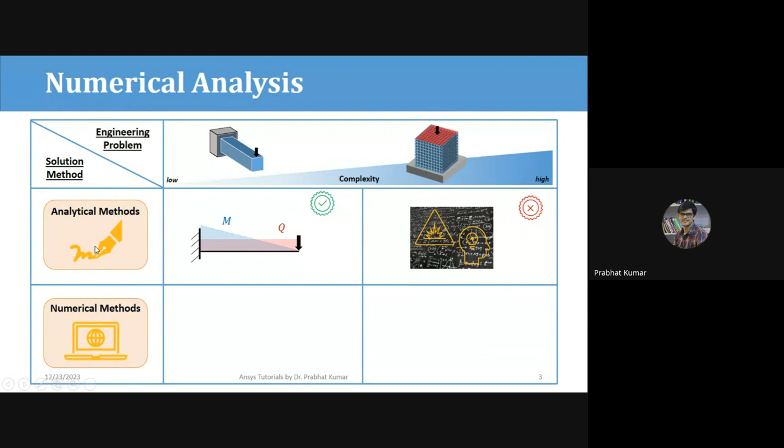Will you be able to do it through hand calculation, the analytical methods? The answer would be no. It is very difficult, next to impossible to obtain the stresses. So for that, we use numerical methods, either Ansys or the different software already available. Here we will specifically talk about Ansys. Through Ansys, you can carry out any type of problem, either simplified problems like this or complex problems also.

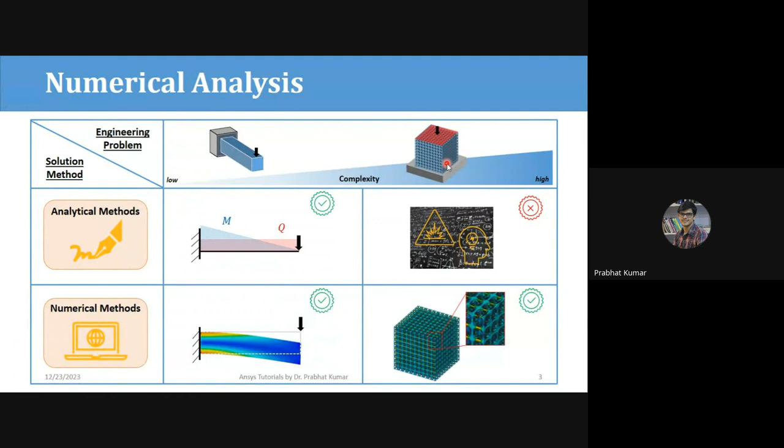Now let's expand our question, like why we use FEA. So there are generally two terms, FEA and FEM. So don't ever confuse these two terms. FEM is the finite element method. It is the mathematical method which is used to conduct FEA.

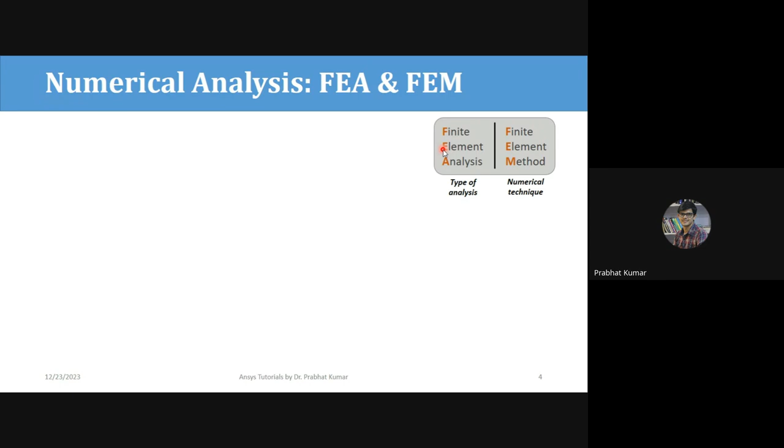FEA is the analysis. And in this FEM, there are different partial differential equations which are solved to describe the physical phenomena. On the other hand, FEA is performed using FEM, and it is implemented in computers basically, so softwares and all. So these are the tools which are basically providing a solution for virtual prototyping.

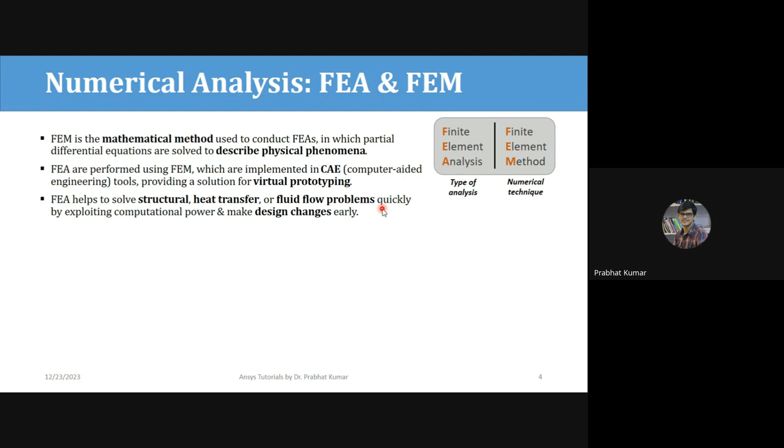And FEA helps to solve structural, heat transfer, several types of problems very quickly, just by exploiting the computational power, and we can make design changes at very early stages of product development. That's why we use FEA.

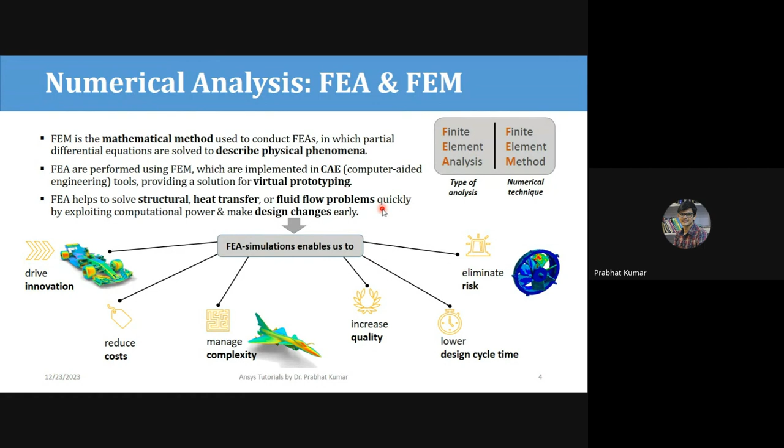If we talk particularly about Ansys, most of you will know Ansys Incorporation. This is the company name, which is the developer of the Ansys family of products. They have a range of products. The global headquarters is in the USA, and they have various offices around the world.

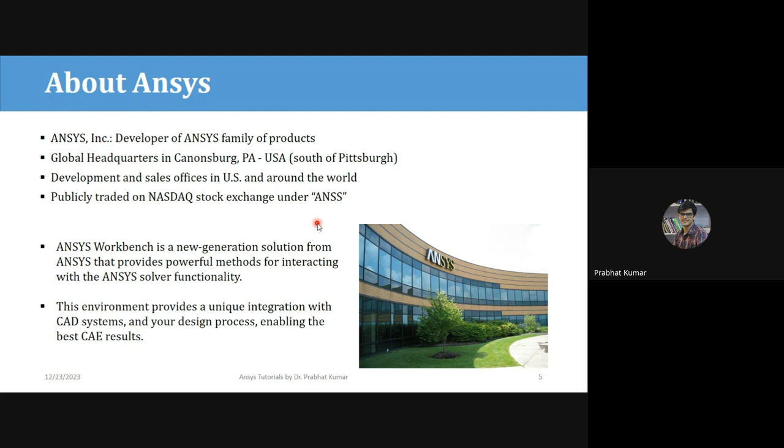We will mainly talk about Ansys Workbench, which is a new generation solution from Ansys, and it provides various interacting methods with the Ansys solver. So in this Ansys family, there are several types of UIs and modules which you can use. The first one is Workbench, in which you can observe the complete environment for simulation and modeling needs.

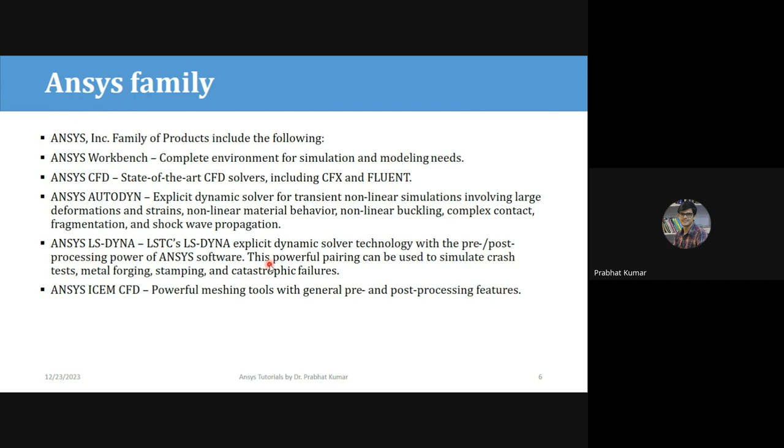There is Ansys CFD, which is computational fluid dynamics. They have different CFD solvers like Fluent, and there is also a dynamic solver for transient nonlinear simulations. They have LS-DYNA, which is an explicit dynamic solver for simulating crash testing, metal forging, stamping, and different types of failures. And they also have some meshing tools.

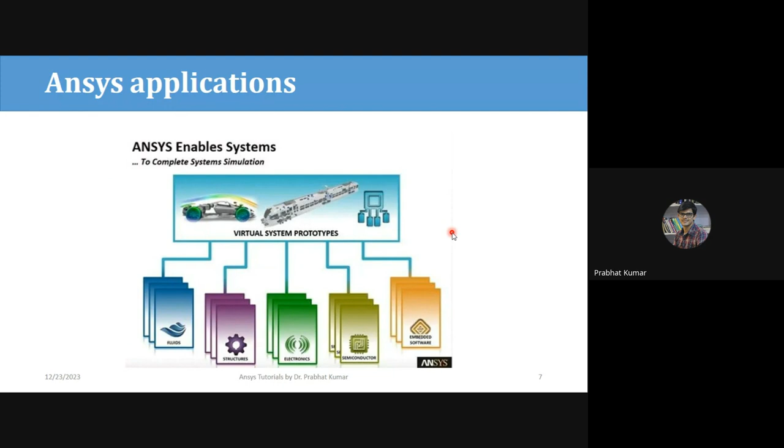So now Ansys, whatever modules you have seen, they have applications in every sector. Be it automobile, defense, even semiconductors and embedded software. That's why this is a complete package, and it is well known in the industry. So what we will particularly focus on today is Workbench.

Now in Workbench, there are also different types of analysis which you can do. The first one is linear stress analysis, where you can determine the deflections, the stresses, factor of safety, etc., mainly under static loading. There is also modal analysis, where you can determine the natural frequencies of the system, including the effects of loading on already pre-stressed structures. So these are the different mode shapes which you can observe when you pre-stress any structure.

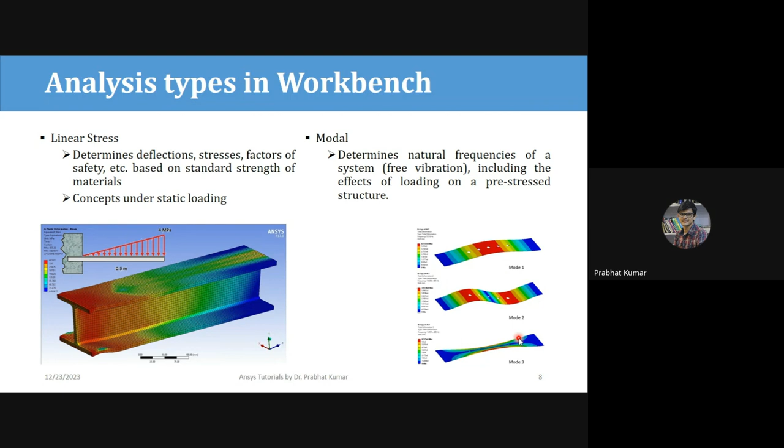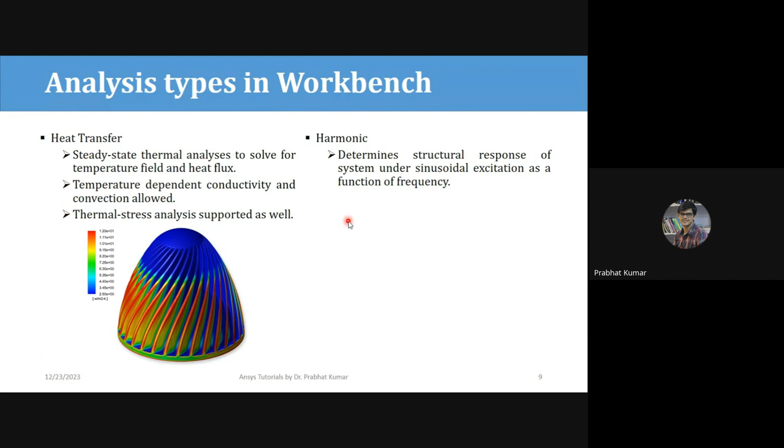Also, you can use heat transfer analysis, where there is steady state thermal analysis to find out the temperature field and the heat flux. Also, you can use Workbench for harmonic analysis, where you can determine the response of certain structures under different types of excitation. So this also you can easily solve. So these are the different types of analysis which you can get through Workbench. I'll explain in actual Workbench also.

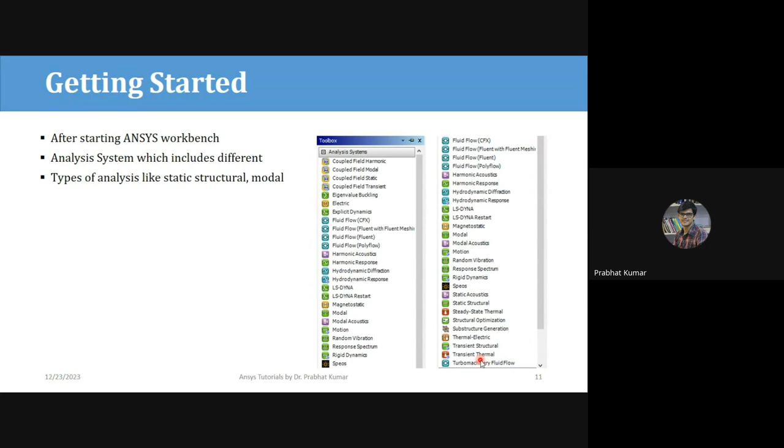So as I've explained, after starting Ansys Workbench, these are the analysis systems. So here you can see explicit dynamics, harmonic response, modal analysis. There is rigid dynamics also, and then there is static structural over here. Transient structural is there. So all these are the analysis systems which are available.

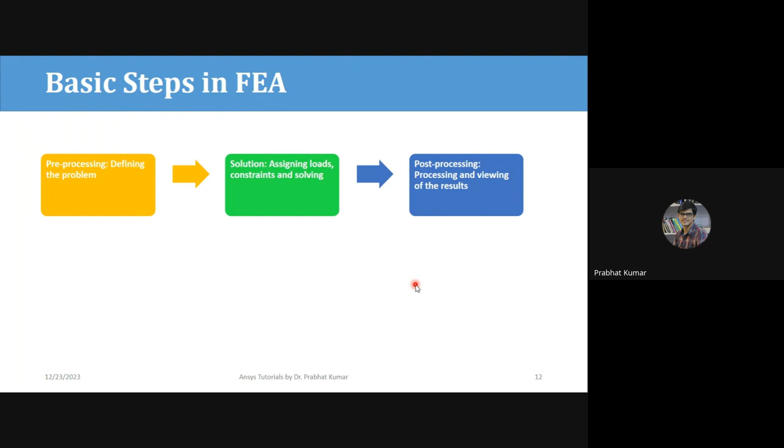So before going into the actual analysis part, what are the major steps which are involved in FEA? So there are 3 steps. The first one is called the pre-processing, in which you define the problem. And then the second one is the solution, in which you assign the loads, the constraints, and you solve it. The third one is the post-processing, where you process and view the results.

So in pre-processing, you define the key points, what are the element type, material, what are the geometric properties, what are the material properties, and then you mesh it. So what is meshing? Meshing is a type of discretization. So if you have a big rectangle over here, and you discretize it into smaller rectangles, then this activity is called meshing. So the entire FEA is based around the meshing, because you mesh and then you apply the loading conditions, and then you get the results.

So in the solution part, the loads and the constraints are specified, and then you solve the resulting set of equations to get the desired results. In the results, you can observe anything, whatever point of interest you have, whether it is displacement, whether it is forces, or you can also get the stress contour diagrams and everything.

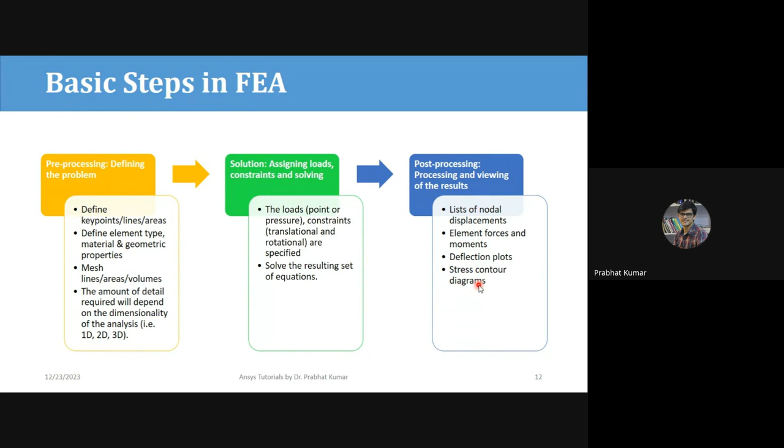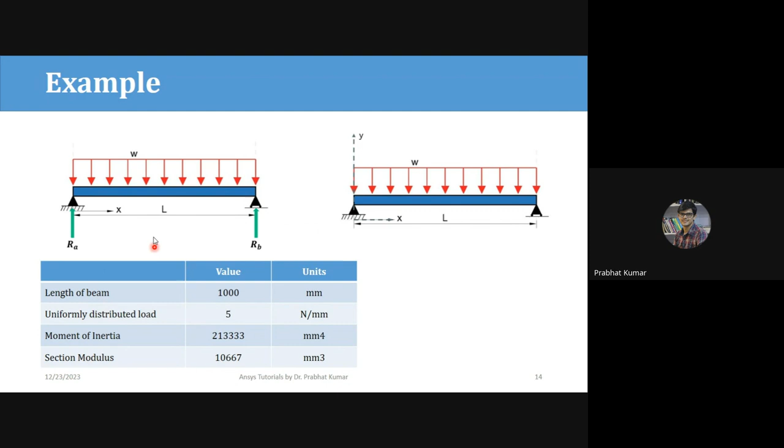So I'll start with the basic pre-processing of one Ansys example. So let's say this is the example, which is a simply supported beam. Okay, so it has a uniformly distributed load over here, and these are the reaction forces. And what you have to find out is what are the stresses and what is the deflection. So how will you do it?

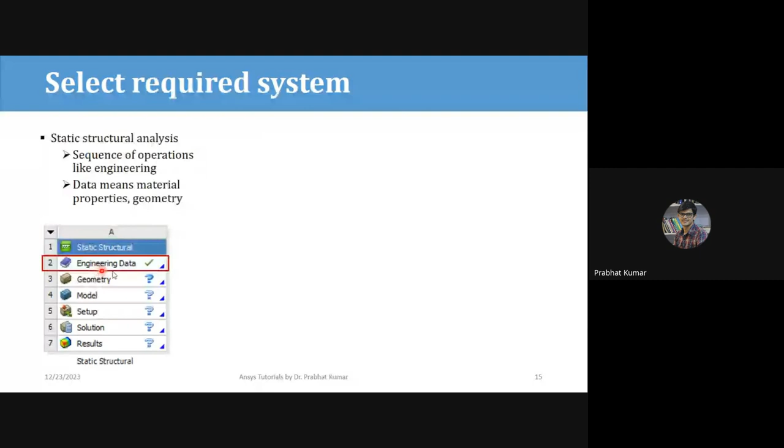First, you start the static structural analysis. So this type of dialog box gets opened up. I'll do it live, and then I'll tell you that also. But before that, let's get an overview. So in this, when it opens up, the first thing is engineering data, and engineering data has the material properties. So when you double click it, such a type of box will get opened up.

So by default, Workbench has structural steel as the default material. It has the properties which you can see over here, the density, compressive strength, and everything. So apart from this, there are different types of materials over here, which you can see. So these are the material properties basically. Let's say that there is a whole library of material which is already available, and you are not finding a suitable material for your need. So how will you do it then?

So for that, you can add a new material also. And for adding any new material, you need only two properties, basically density and the Young's modulus, the modulus of elasticity. These two properties are needed. When you feed them, you can have your own material ready with you.

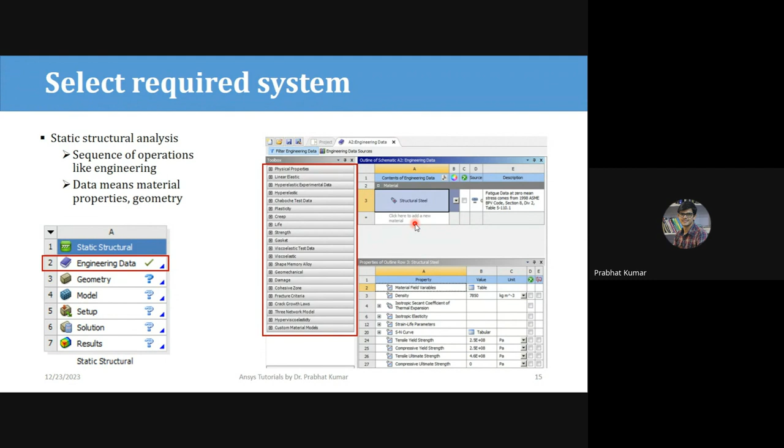So the next part is geometry. In geometry, there are two options. Either you can create the geometry in Ansys DesignModeler or SpaceClaim, which is their own interface which you can use for designing purposes. Or the second one is you can design any geometry in the software of your interest. Let's say you can design it in SolidWorks, in Creo, CATIA, anywhere, and then you can just import it. For importing, you have two formats. You can use IGES or STEP only.

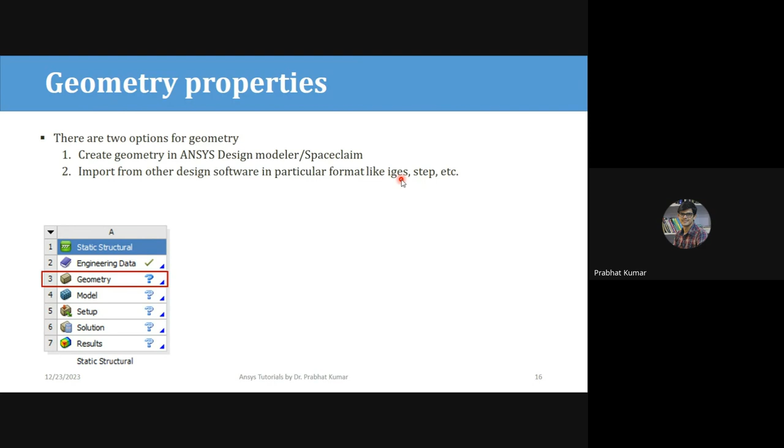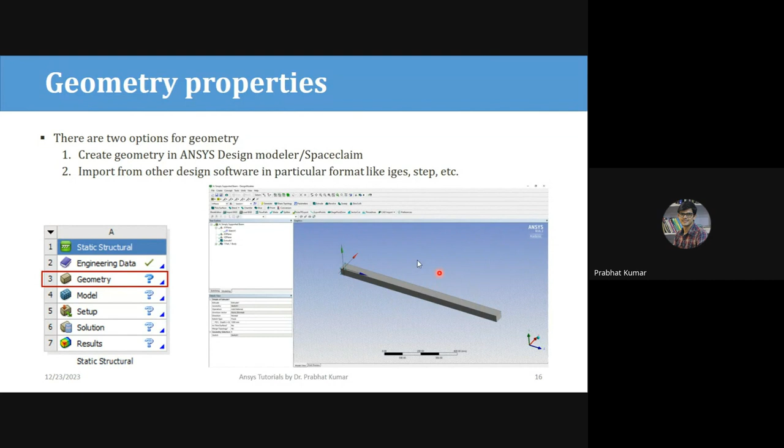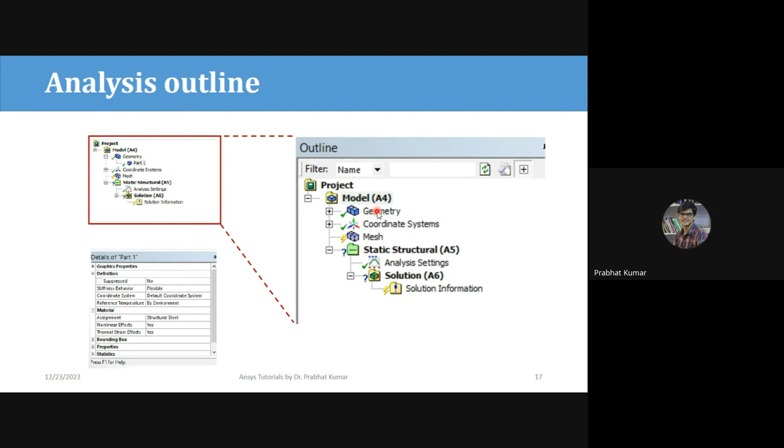So this is the example, the simply supported beam. This is designed in DesignModeler. Okay, so I'll explain that also later on. After this material, the third part was you click on the model. Once you click it, such a type of dialog box will open. Here you can see you have geometry, the coordinate systems, meshing, analysis settings, and everything. So you click on the geometry and then you can see what material you have given, whether it is coming over there or not.

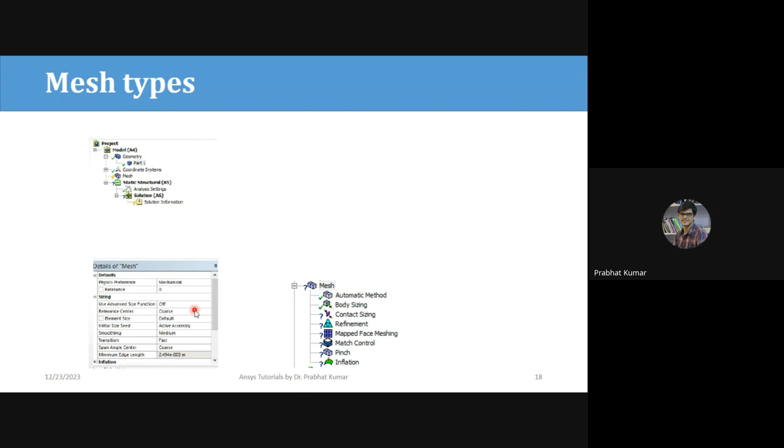But there is a whole lecture which needs to be delivered for this meshing. Meshing itself is a huge task. Here you can see different types of methods which are there in meshing.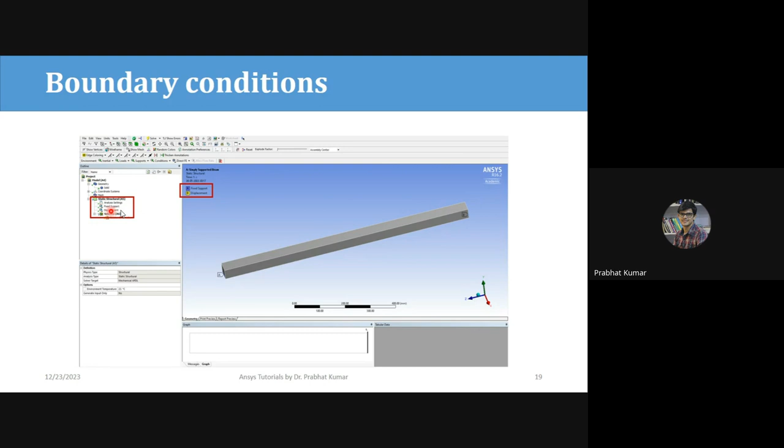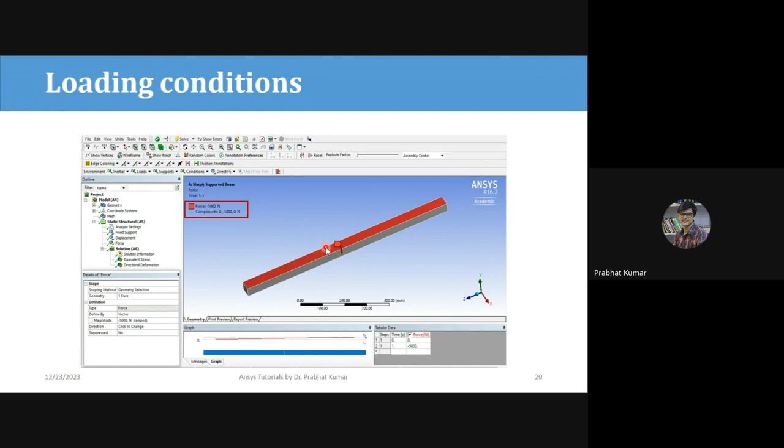So for that, you can just right click on this static structural and you can insert these supports. Okay. The next is, after applying the boundary condition, you have to apply the loading condition, like what loads are there. So let's say we are applying a load of 5 kilonewton. So this is the type, and then once you apply the loads and everything, you do the post processing. You just solve it, and after solving, you get the results.

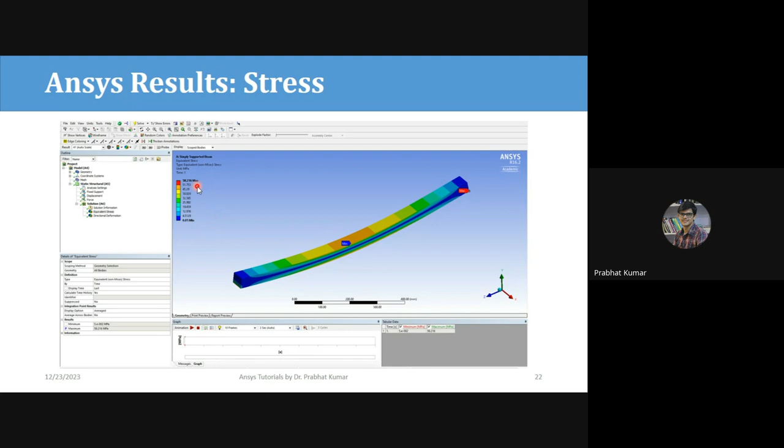So that simply supported beam has a stress value of 58 megapascal. This you can compare with the yield strength of the material, and you can see what is basically the factor of safety. That also can be easily calculated through Ansys Workbench. You can also observe the deflection. Here you can see the deflection is around 1.2 millimeter. So through this you can cover a basic overview of Ansys Workbench.

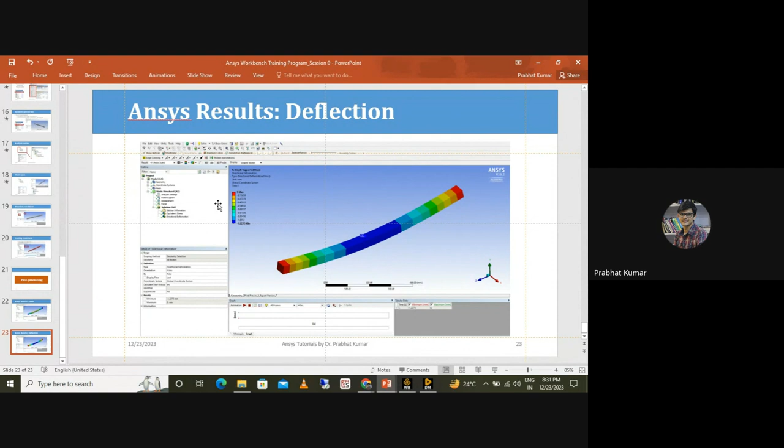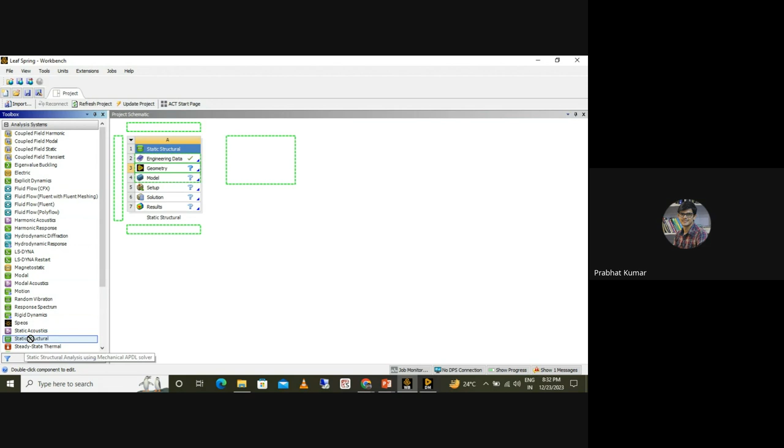Okay. Now let me show you the exact UI. So here you can see this is the user interface when you open it. Okay, this static structural will not show up. How it will come: either right click, double click, or you can just pick it up and place it over here. So that also works. So after clicking the static structural, this type of dialog box you can see.

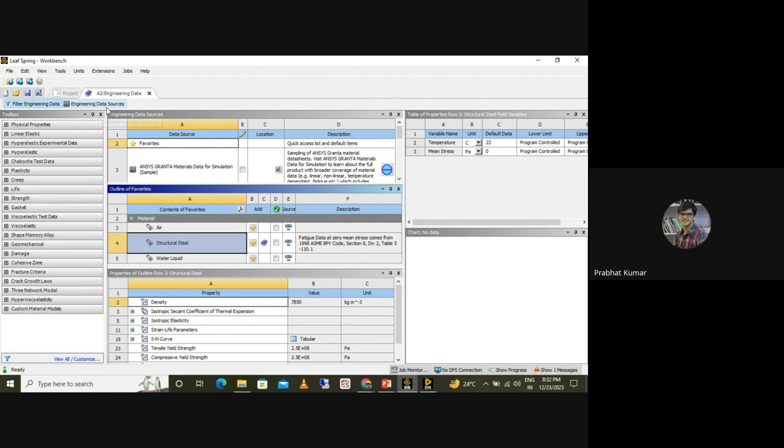So as I have explained, you have engineering data. Okay. So in the engineering data, you can see different types of materials are there. Here is the engineering data source. Here you can see what the materials are. So air, water, liquid, a lot of materials are there. Here you can see there are geomechanical materials, there are composite materials. So everything is there.

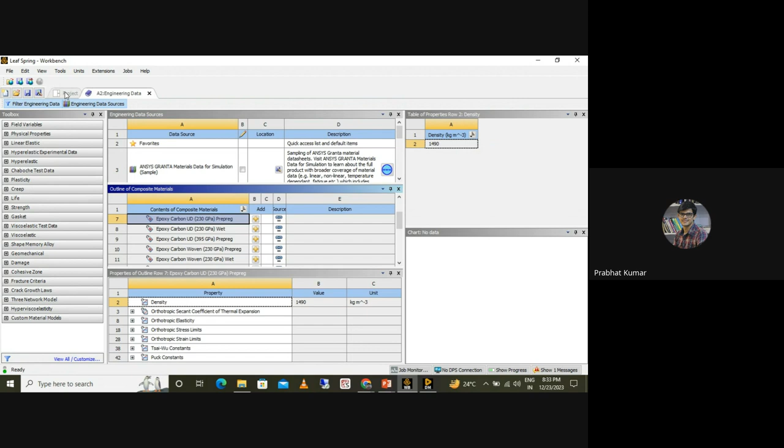So you can just click on this epoxy and add it, and it will be added. And then you can go to your project. So for now, I have not selected any material. By default, it will take structural steel as the material. So after that, what you have to do is import your geometry. For geometry, I have already explained there are two ways. The first method is you can design your own geometry in DesignModeler or SpaceClaim, and the second one is to import it.

So for creating, just right click, and here you can see. Since I have already opened this DesignModeler, it is asking for edit geometry in DesignModeler. But when it is not opened, here you will be getting new geometry in DesignModeler, and you have to click on DesignModeler. So once you click on DesignModeler, this type of user interface you will get. Okay.

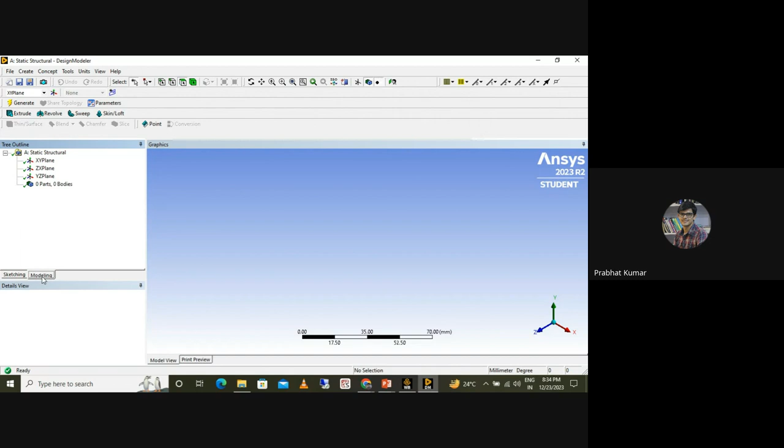The very first thing you have to do is click on the units and set them as per your requirement. Somewhere it is inches, somewhere it is meter or millimeter. So we will go with millimeter. Okay. So here you can see these units are displayed over here. Now in DesignModeler, there are two modes. Here you are able to see sketching and modeling. So this is the sketching module which we will use.

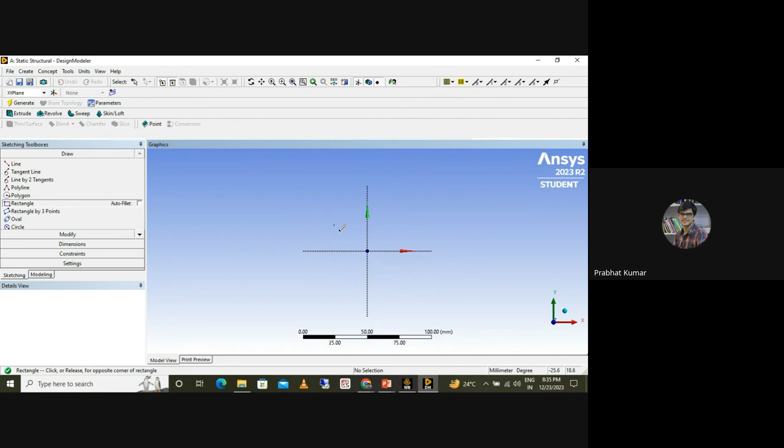And let's say I'll just go and explain the normal one. Let's say we are making a normal rectangular plate with a hole. So how will we do it? We'll just click on sketching, and then we click on a rectangle. Before clicking on that, here you can see it is in 3 dimensions. Okay, it is the XY plane basically. Now what you have to do is click on this look at face sketch so that it will be perpendicular, and then you can go to rectangle and draw a rectangle like this. Okay.

Now it has been drawn. You have to provide the dimension. So just click on dimension and click here for these 2 dimensions that we need. By default it takes h1 and v1 or v2. So h1 is this one. Let's say the square is of 50 by 50. So you click on 50, then you double click here, make it 50, so it is a square.

Okay, again you go on draw. Maybe we will draw one circle. And then again go on dimensions, you can give dimensions to this. Let's say it is of 20 millimeter diameter.

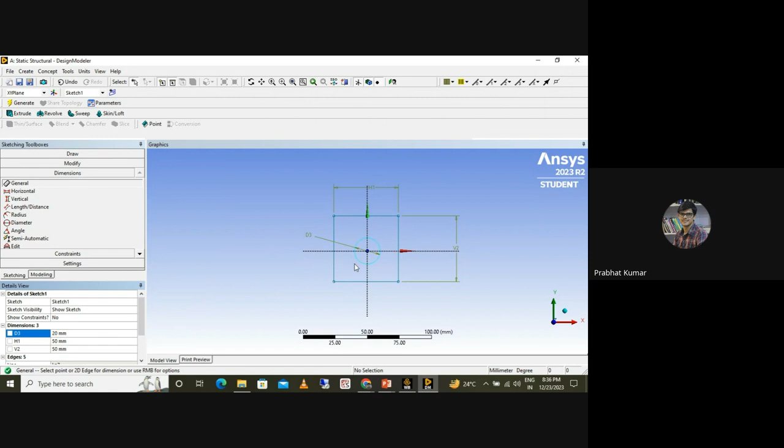Once you draw it, what you have to do is you have to extrude and click on this generate. Now you can see, so this is the small square plate with a hole, center hole in this.

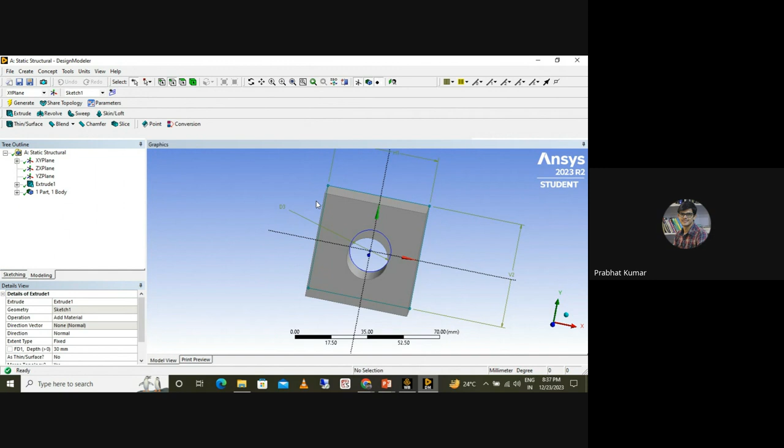So what you can use is you can go here and then you can just open the model part. So when you open the model, the one part that you have created in design model, that will get opened up in the actual model part automatically. But let's say that we want to just import our already saved file, which is there in some IGS format. So then we can go on geometry, I'll show that also later on, and then we can import it from there also. So let's give it a little bit of time so that it gets opened up.

So here you can see this is the interface of the mechanical workbench. It is still opening up, so we will be able to see.

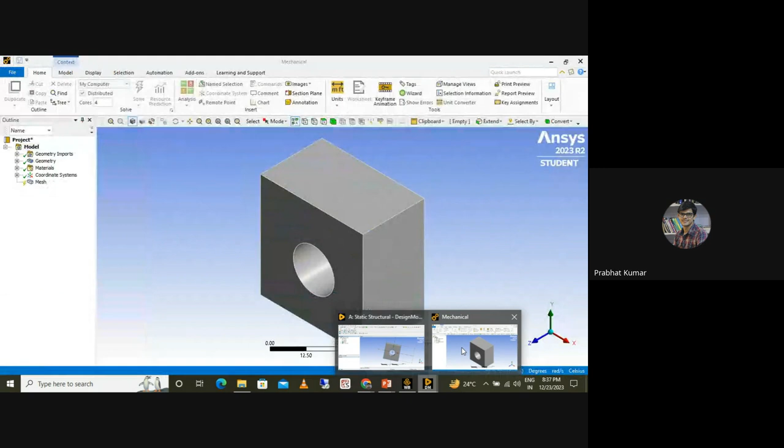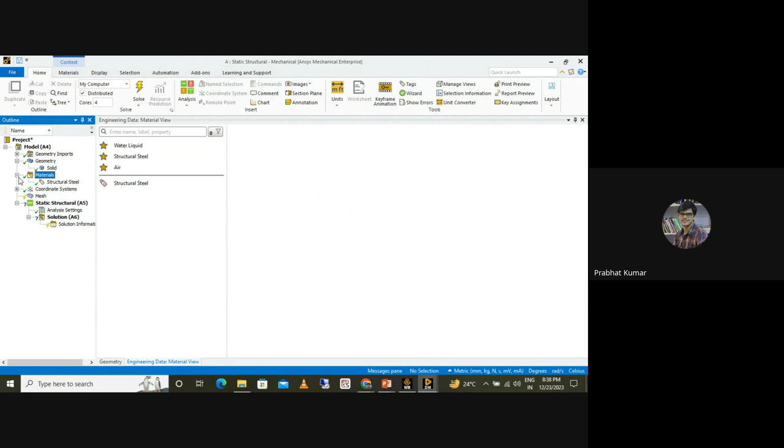So this is the part that we have already designed. Here you can see the geometry, it is a solid. Then material, you can see structural steel, it will take it by default. Structural steel has the following material properties: Young's modulus, the Poisson's ratio, everything.

And then we'll go on meshing. I think it is still opening up.

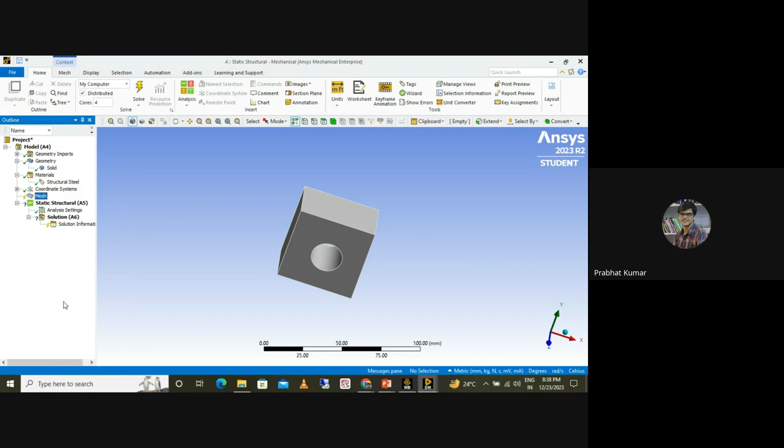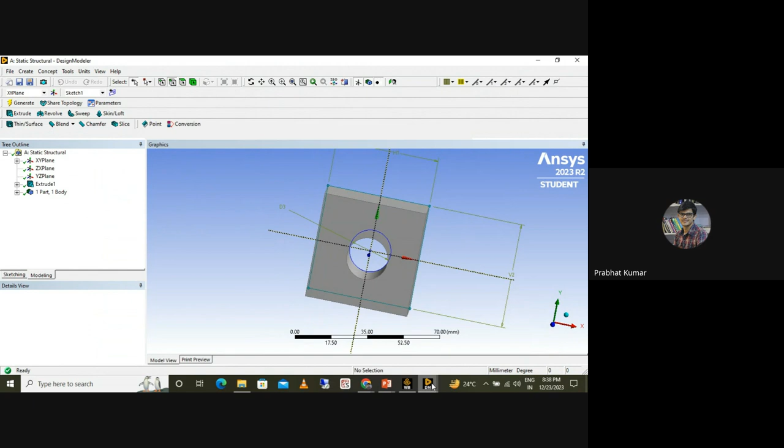So this was just an example which I was showing, in which I showed how you can use the design modeler part. In Ansys, you have two different modelers which you can use. Now I'll just close it, and I'll open the actual one, the leaf spring part, which I'll be explaining.

So this design modeler which I have just shown right now, that is good, but for easy parts, not for complicated parts. Let's say you have to make some gears or some big complicated parts which has different geometry, shapes, and all, then you will not be able to use it because it is not that user friendly.

So for that, what we do is we just create our own model. Let's delete this, then I'll just drop it over here. So for geometry, we can design our geometry in any SolidWorks software, anywhere, and we just click on import. You can browse, and then whatever file you have made, you need to just save it in IGS format. Make sure that you have saved in IGS format, and then you can open it.

The geometry is open, just double click on model. So meanwhile this model is getting opened up. As I have already mentioned, there are two different modules, or you can say two different modelers in Ansys. The first one is called design modeler, the second one is called SpaceClaim. Design modeler was the only modeler which was provided by Workbench until they were using Ansys 15 version.

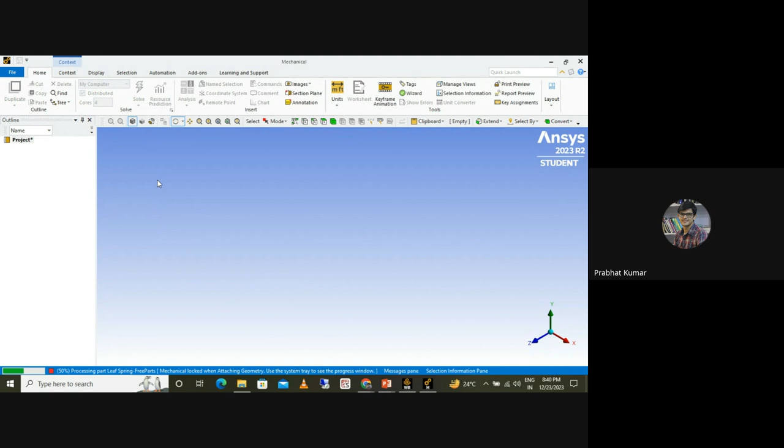So for simple small models, design modeler is well enough, but not for complicated large models. So in Ansys 16 and 17 onwards, the SpaceClaim was included in Workbench.

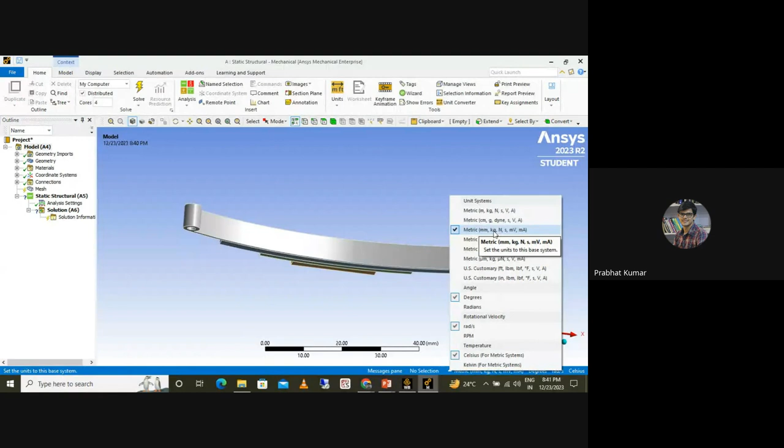So here you can see this is the leaf spring design. You can design it anywhere, and then you can save it in IGS, and the way I have shown, you can import it. When this is the user interface, when you get over here, the first thing you have to check is this one, metric. Make sure that your metric is kg, this one. So this is the geometry, and since there are 4 parts, it is showing the different parts also.

See here, you are seeing contacts. This is another important part. Let's say you are making some bodies consisting of 2-3 different parts, and then how you have to do it. So these are the contact regions basically.

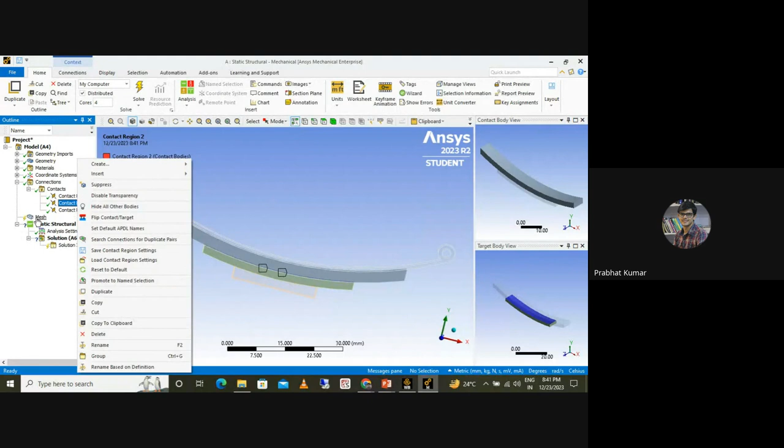I think some module is missing because I'm not able to. Okay, fine, so these are the contacts which is there. Now contacts will be of different types: either bonded contact, or friction contact, or anything. So based on that, the contacts are defined. You can go and define your own contact in Ansys. That is a very good provision which is there in Ansys Workbench.

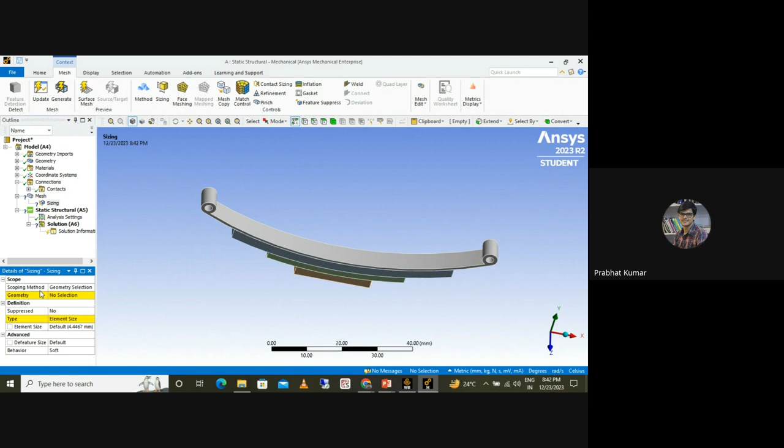So for now we will not look into any contact. What we'll go with is meshing, and here you can see mesh. These are the different geometry which we have to mesh.

So it is asking for sizing and all. What is the element size? Let me close it, I think there is some issue with that.

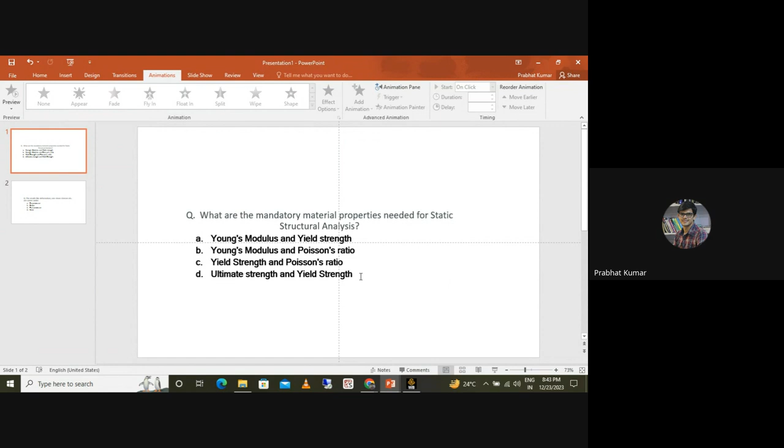So meanwhile, I'll just open it up. I have some questions. Okay Mayank, I'll ask you to see what answers people are giving. So the question is, what are the mandatory material properties needed for static structural analysis? Can you paste it over the chat box so that it will be easy? Is it there in the chat box, Mayank? Yes, yes. Okay, so anybody can try answering it. Meanwhile, I am opening this. Any answers coming up everyone? It's not possible to write on chat, but you can add your answers on a question answer. Yeah, sure.

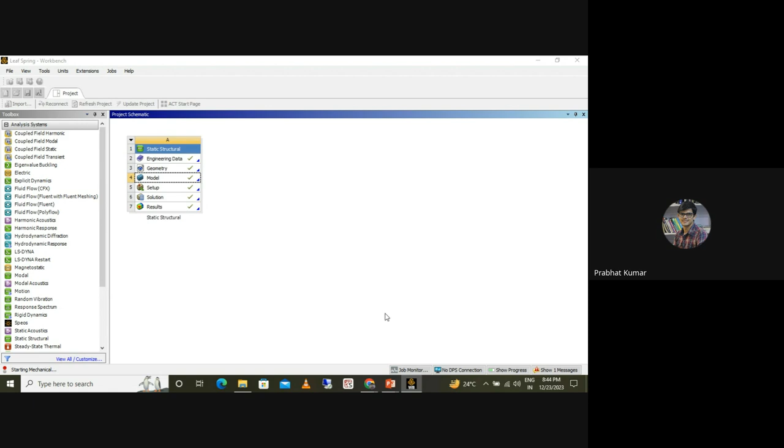Generally it takes a little bit of time to open up properly. Yes, so here we are. This I have already solved, so I'll explain. Let's start again. So here we are seeing the different parts like geometry.

When you click on geometry and materials, you'll be able to see what are the different types of material. You have to go on the meshing part. When you click on mesh, this is the dialog box which appears. Just keep it for default, and you can change the element size. Let's say we put 10 as the element size. Once you click on this, just update the mesh, and it will be ready.

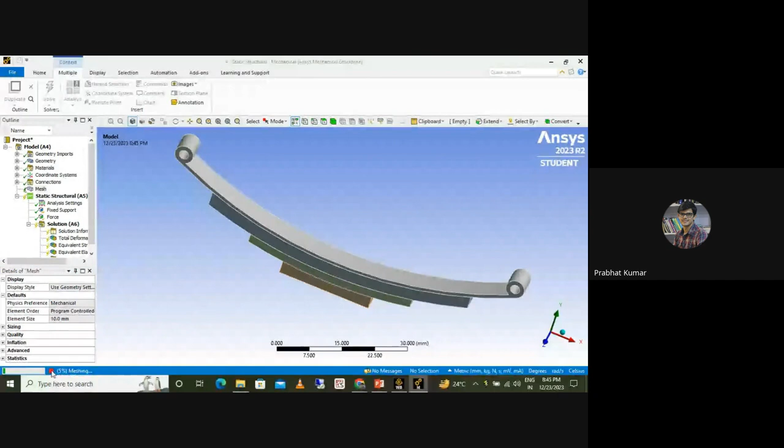So here it is, here you are able to see meshing. See how coarse the mesh has become now. It is always better to go for finer meshing to get better results. So let's go for 2 of mesh and update it. Yes, so this is the mesh. You can go for 1 also, 0.5 also. But the finer the mesh, the harder, or you can say the time consumption becomes more and more.

So after meshing, what you have to do is go on this static structural part, and assign the supports. So in the leaf spring problem, let's say these 2 points are fixed, and we are applying a load at this bottom part. For that, you go on static structural, go on insert, and go to fix support. Let me delete this, I'll show you right away.

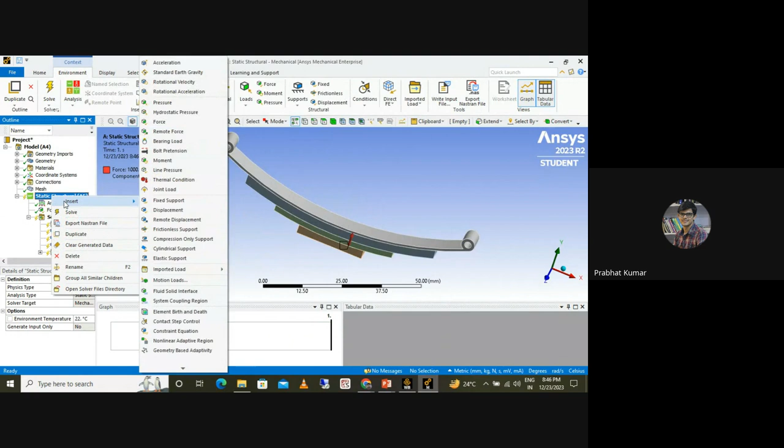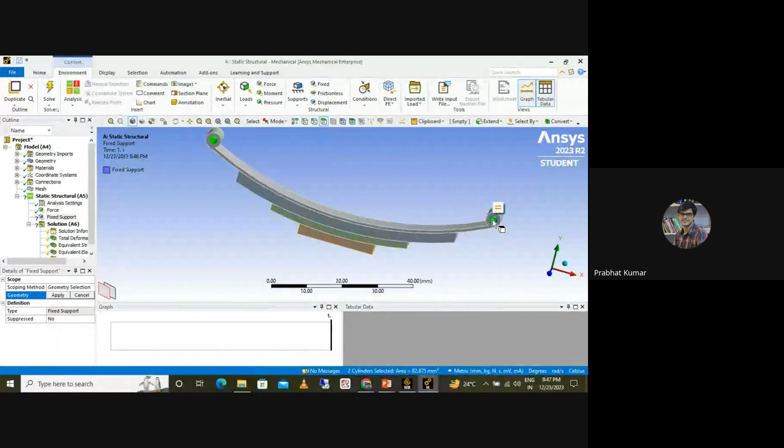So what we will do is go on insert, fixed support, and then click on the faces. There are different options: either you click on vertex, or edge, or face. For easier part, we will click on this face. Once you click here, go and click at this part. Since we have to select this face also, press the control button and select this part too, then go for apply. As you apply the fixed supports, it will become like this. Here you are seeing blue colors at these 2 points.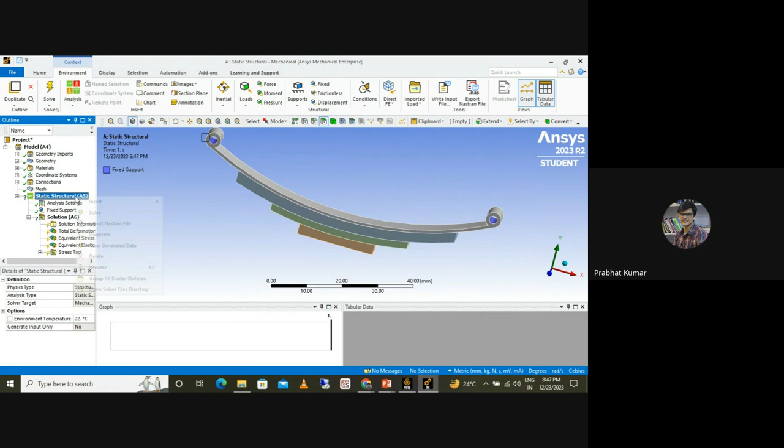Now, after this boundary condition, the next step is the loading condition. For that you go and insert, different types of loads are there: pressure, force, remote force, displacement also. It depends on the nature of the problem given to you. So we will go with force. Select on this face, it will ask for scoping method, which is the geometry selection, like which face you have to apply the force. Let's say this is the bottom part and you click on apply.

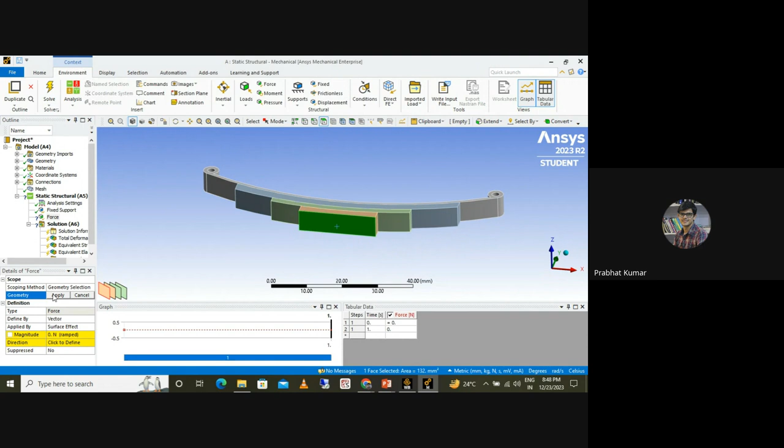Now the force is applied, but you have to provide the magnitude also. For that there is an option defined by vector or components. You have to click on components, because there are three different components you are seeing here - this is the coordinate system, x, y, and z.

Let's say the problem is that the load is applied from down to up. In that case, what will be the coordinate? Y coordinate. So x and z you have to keep as 0, and you just provide the y component. Let's say it is 100 Newton. As soon as you put 100, this is the arrow which is coming up - it means the load has been applied.

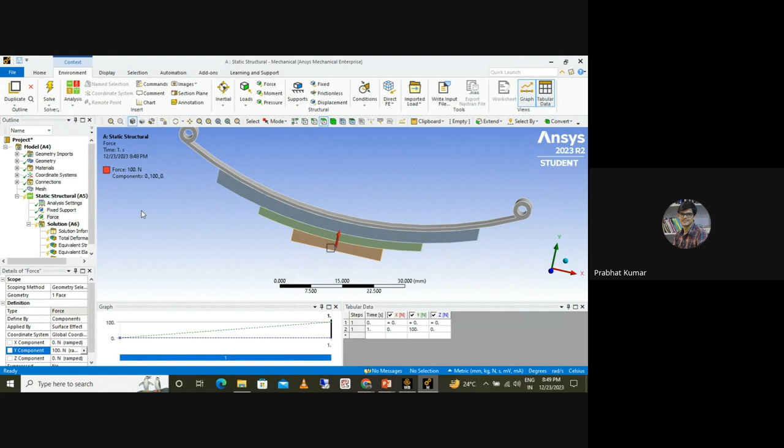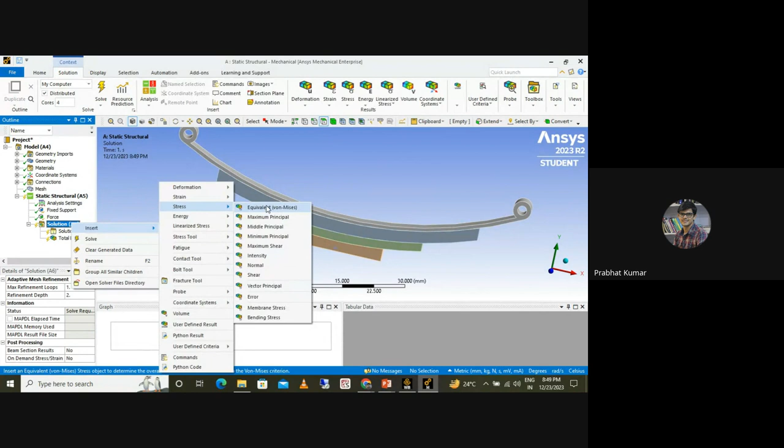Then you have to go to the solution part. Here the problem is defined, and now we have to solve it. While solving, you need some results, so it depends upon your requirement. First one will be, let's say, deformation. So you can go insert deformation, total deformation. Then you can also see the stresses - what is the stress? So let's say we are interested in these two results.

You just input these results and solve it. When you solve it, it will take some time depending on your computer capabilities, and it will solve and give you the results - what is the total deformation and what are the stresses.

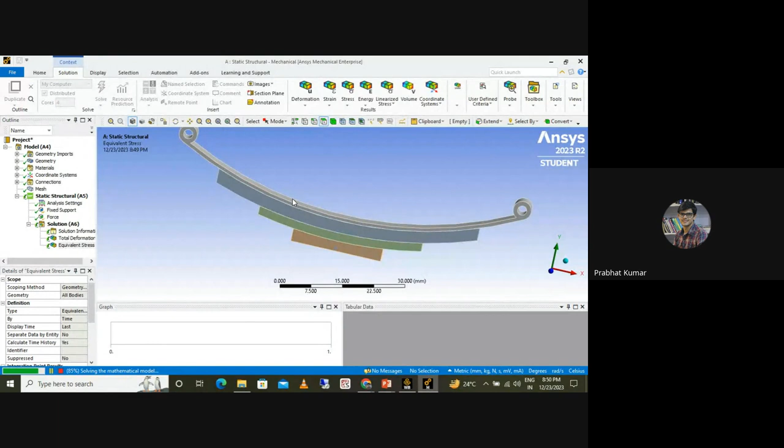Here you can see it is building the mathematical model. On the back of this modeler, all the calculations are going on, and based on those calculations it is solving and trying to fetch the results for you. Now it is evaluating the results, and here you are done.

When you see this red color, it means it has the maximum deflection. What is the maximum deflection? It is around 0.006. You can play and see how it is deflecting. So this is the deflection.

And when you click on stress, the maximum stress is around 42 megapascal. You can also check what are the regions where the maximum stress is happening. These are the regions where there is maximum stress, which is the boundary condition where you have fixed the point.

So the deformation you are seeing - it is showing large deflection, but the value is very, very less, 0.006 mm. In the result part, there are different options. If you click on true scale, this is the actual scale which is happening, and when you play you will not be able to see any deflection, which is the actual one. So in the previous view, it has been exaggerated by some factor - that's why you were able to see it.

So actually in true scale, it is very less, the deformation, and which is right also. It is hardly 0.006 mm, so by naked eye you will not be able to observe the effect. So this is the simulation.

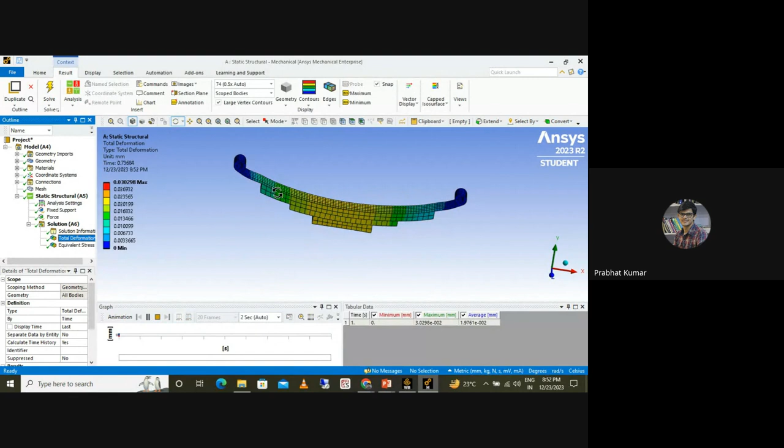So earlier what was the result? 0.006. Now it has increased by 5 times, so it is not always linear. Here we are in true scale - let's say this is the scale. Now you can see the deflection, and you can also see the stress. What is the stress? Just 213 megapascal.

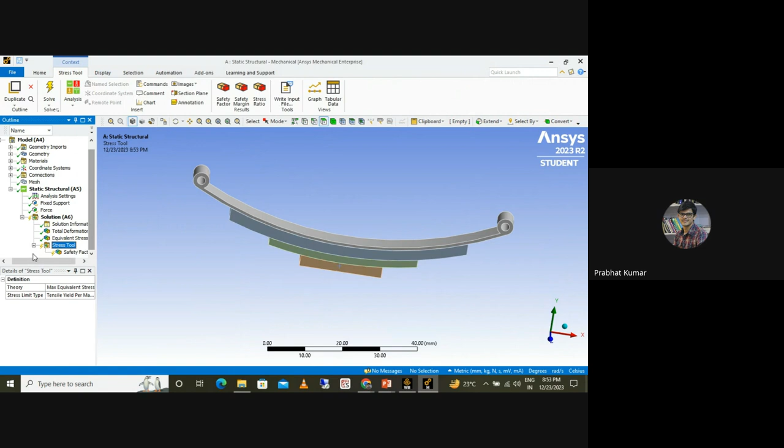Let's say you want to see what is the factor of safety. For that, you can click on insert, then stress tool, and then in stress tool just click on this plus button - you will be able to see safety factor. Since we have not included it right now, it has not been calculated, so you just have to solve it, and then you will be able to see it.

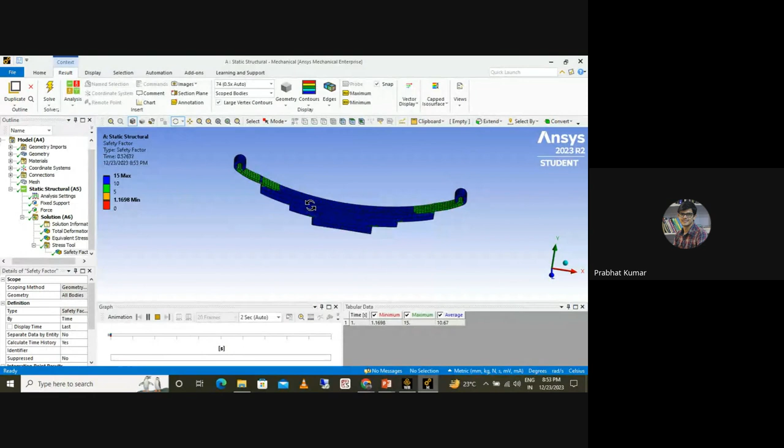See what are the results. The minimum factor of safety is 1.16. So at some points, the factor of safety is 1.16, and that is for the red part, not even red, the brown ones mainly, or the yellow ones. So let's say we increase the force and then we try to see what is the effect. So we'll increase the force and then solve it.

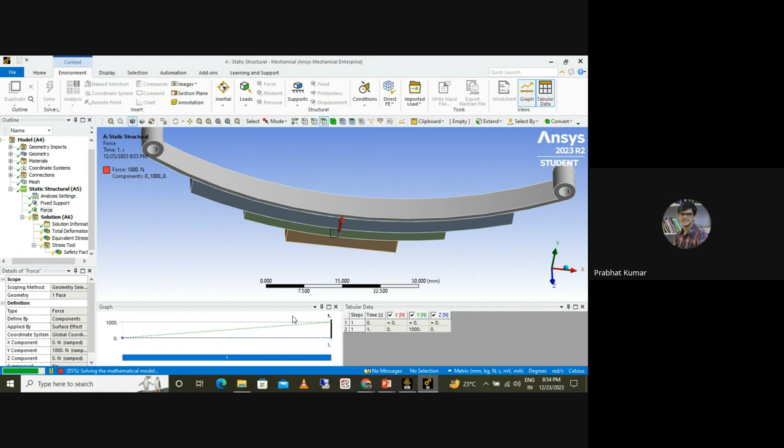So structural steel, as most of you are mechanical engineers, you must be knowing it has yield strength around 200 megapascal, 200 or 210 probably. But when you click over here, the stress value is 427 megapascal. It means it will go in yielding, and based on that, the factor of safety you are able to see is 0.58. So it means the design will fail. Okay.

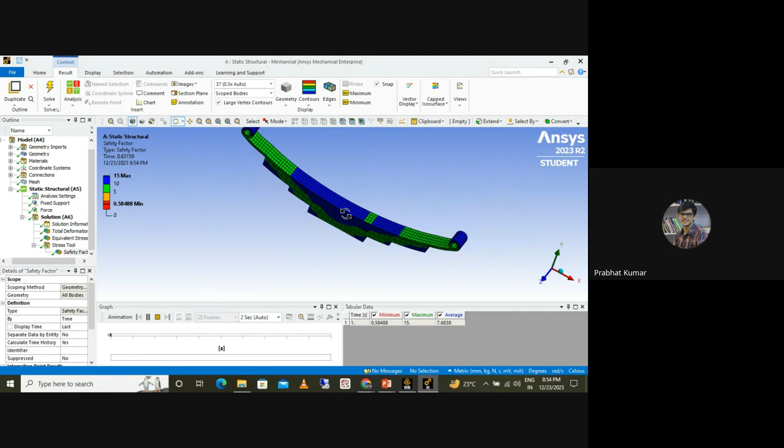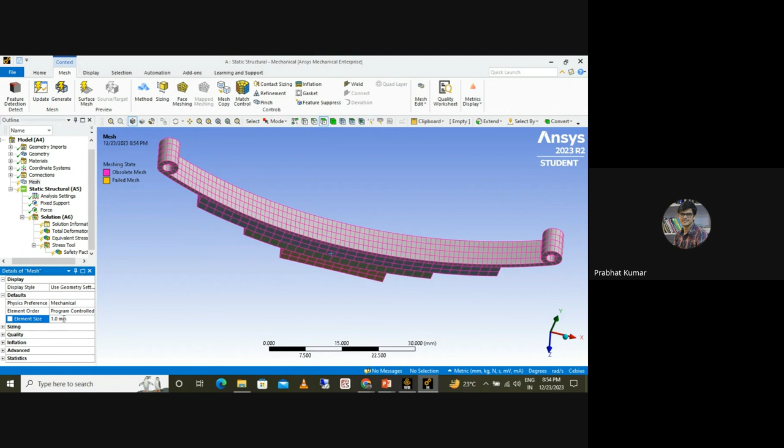So here you are. Let's say our stress value is 400 megapascal. The deformation is 0.06. Let's see how this meshing will affect the results mainly. So let's say we have given 2 mm. Now we will go for probably 1 mm. Okay, just change it to 1 mm. Update the mesh. It will update all the mesh.

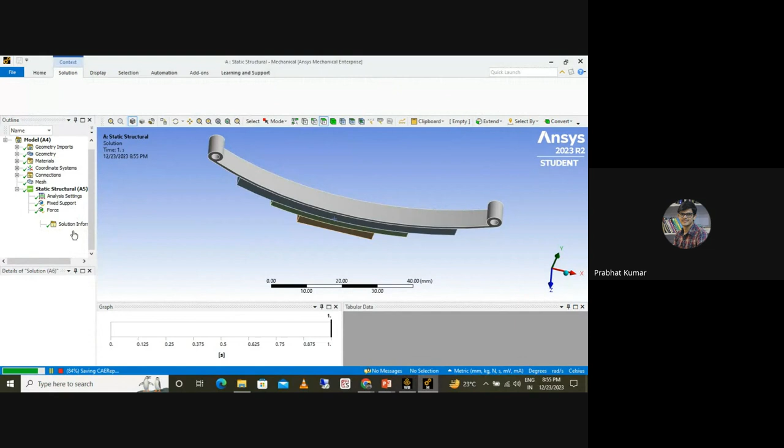Since the mesh has been updated, the solution will change. Earlier it was 0.06. Now you again have to solve it, and then you just see how the meshing is affecting the solution part. We will solve it and we will see. And see, it is 0.06 only, but earlier it was 0.060 something. The stress was 420 or something around that. It has increased now. Okay.

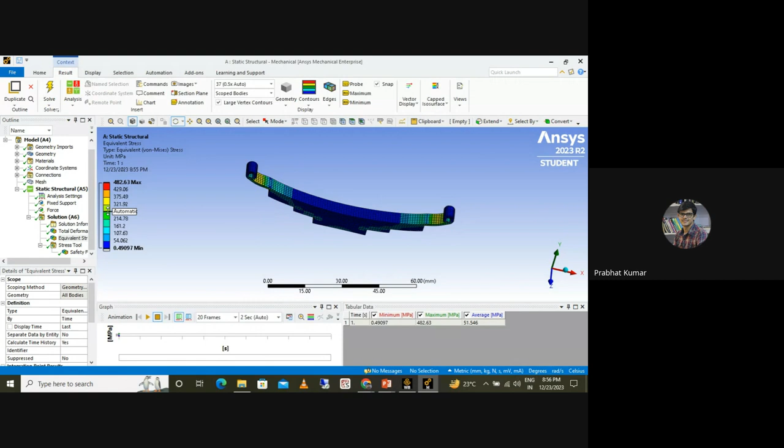So then the question might be there in your mind, how will we identify the perfect, or you can say the appropriate mesh size for any such simulation or analysis. For that also there are different types of analysis. You can go for convergence analysis and you can converge to a particular mesh size. Beyond that, even if you are changing the mesh, it is not going to affect your simulation results. So that is the ideal mesh size for your case. Okay. You can observe what are the different types of results which are there.